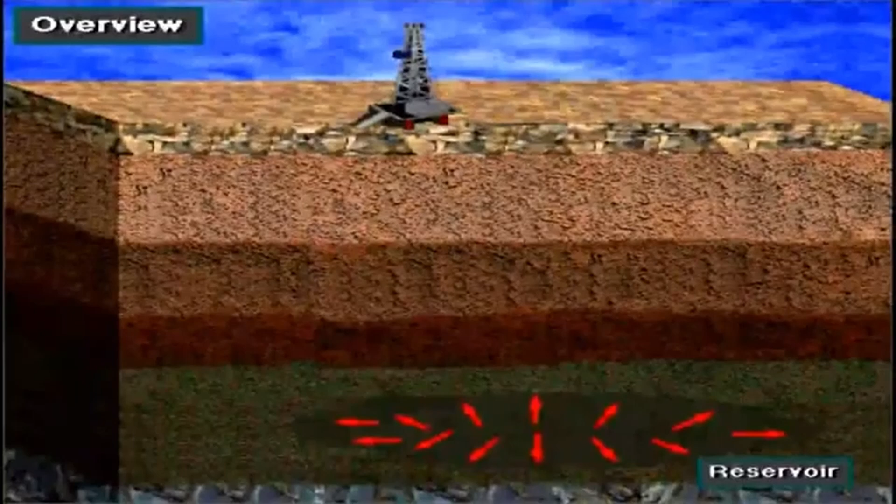Fluids in a formation are under pressure. When drilled, this pressure can escape to the surface if it is not controlled.

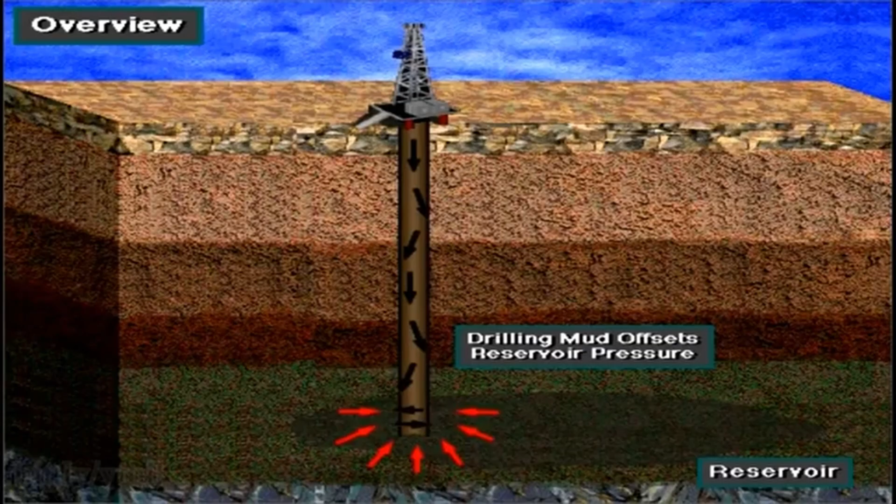Normally, drilling mud offsets formation pressure. That is, the weight or pressure of the drilling mud keeps fluids in the formation from coming to the surface. For several reasons, however, the mud weight can become lighter than is necessary to offset the pressure in the formation.

When this situation occurs, formation fluids enter the hole. When formation fluids enter the hole, this is called a kick.

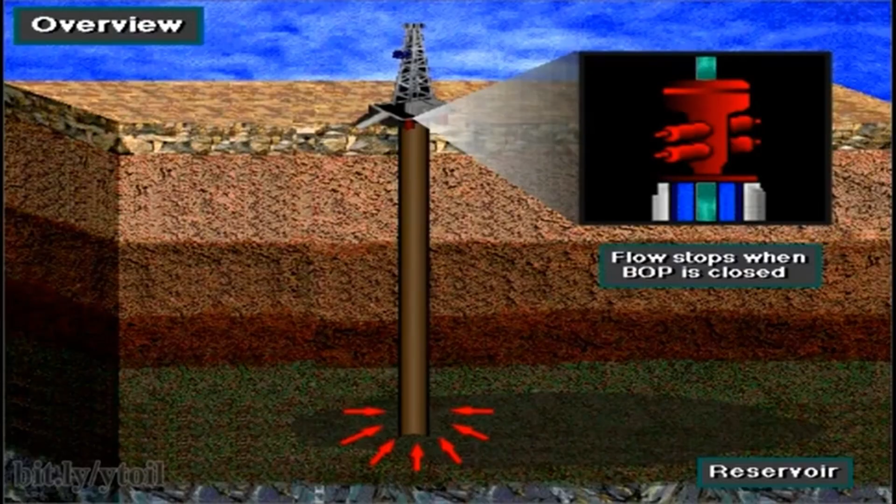A blowout preventer stack is used to keep formation fluids from coming to the surface. These are called BOPs. By closing a valve in this equipment, the rig crew can seal off the hole. Sealing the hole prevents more formation fluids from entering the hole. With the well sealed or shut in, the well is under control.

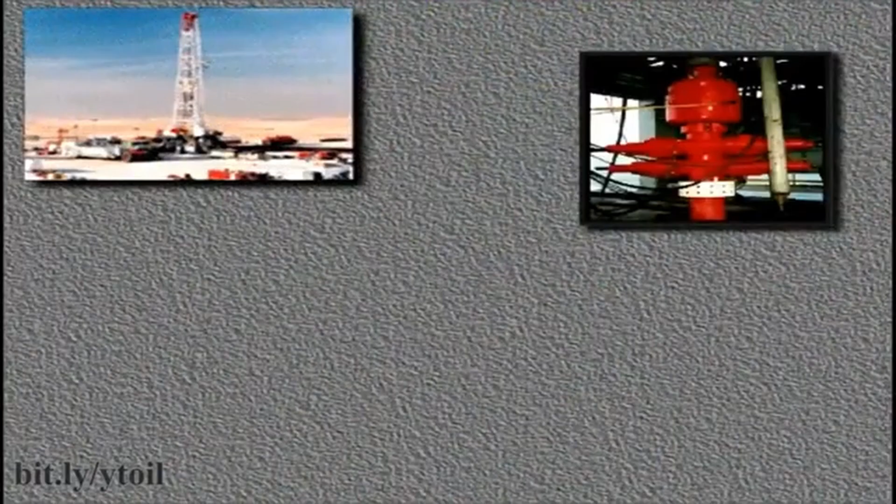Rig crews use a surface BOP system on land rigs, jackup rigs, submersible rigs, and platform rigs. They use a subsea BOP system on offshore floating rigs, like semi-submersibles and drill ships.

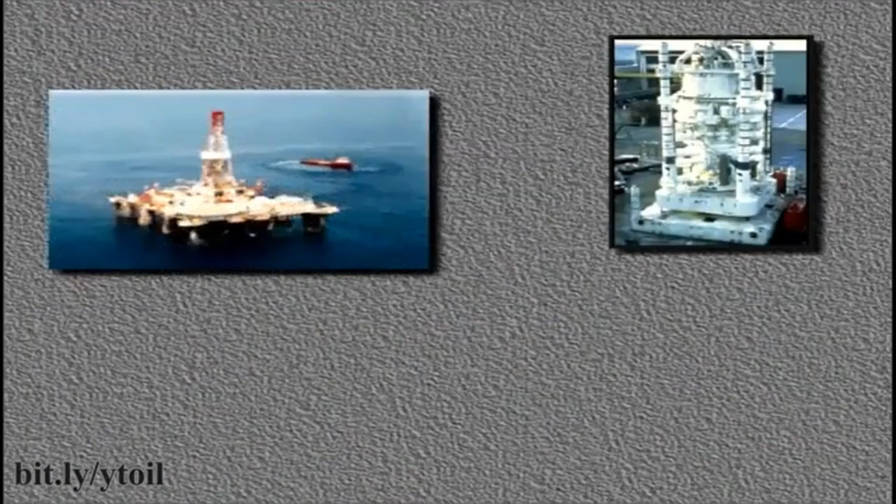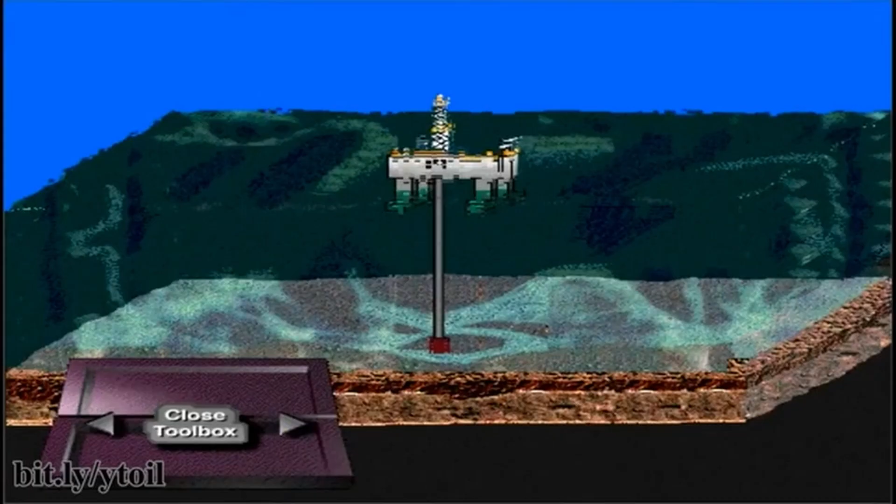Why do you suppose subsea BOP systems are used on semi-submersibles and drill ships? Blowout prevention equipment is very large and very heavy. Semi-submersibles and drill ships are dynamic, that is, they float and thus move with the wind and waves while in the working mode.

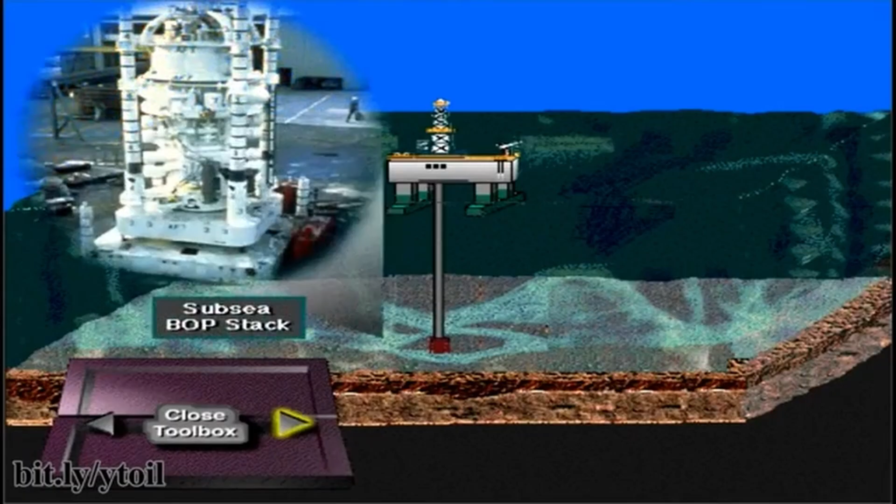On floating rigs, it's not practical to mount the BOP stack on top of the long riser pipe. The BOP stack is much too heavy for the relatively thin and flexible walls of the riser pipe. Also, because the riser walls are relatively thin, they cannot withstand the high pressures that could develop inside the riser when the well is shut in on a kick.

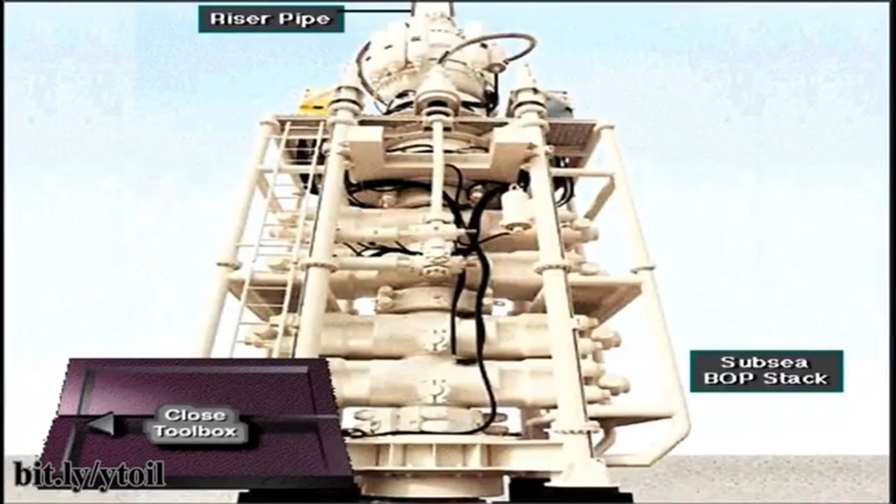So the rig crew mounts the BOP stack on the wellhead at the seafloor and makes up the riser on top of the stack. A blowout is dangerous.

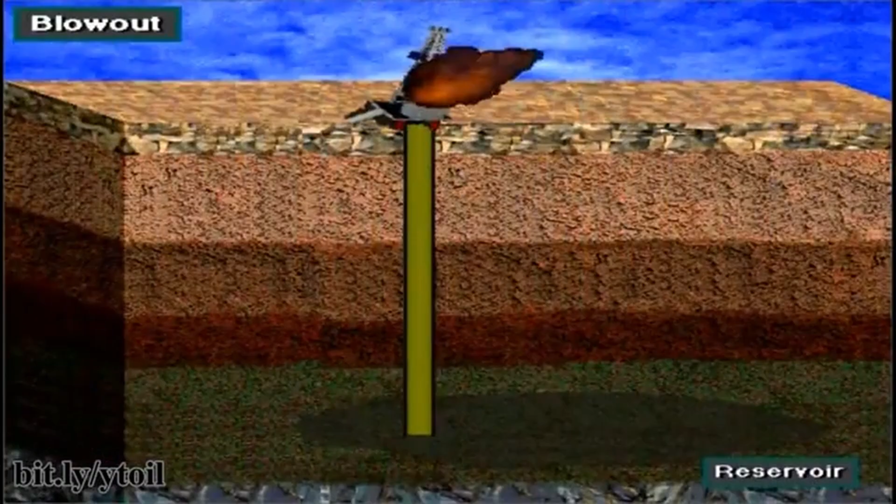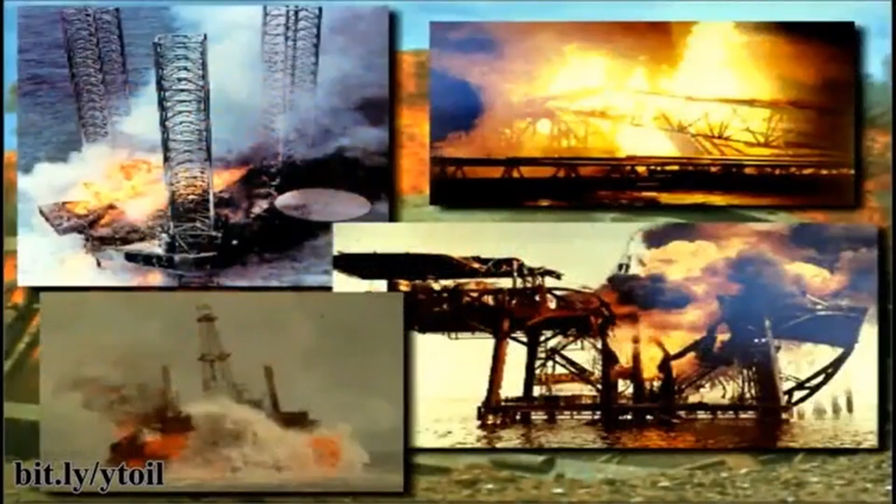Formation fluids like gas and oil blow to the surface and burn. Blowouts can injure or kill, destroy the rig, and harm the environment. Rig crews therefore train and work hard to prevent blowouts.

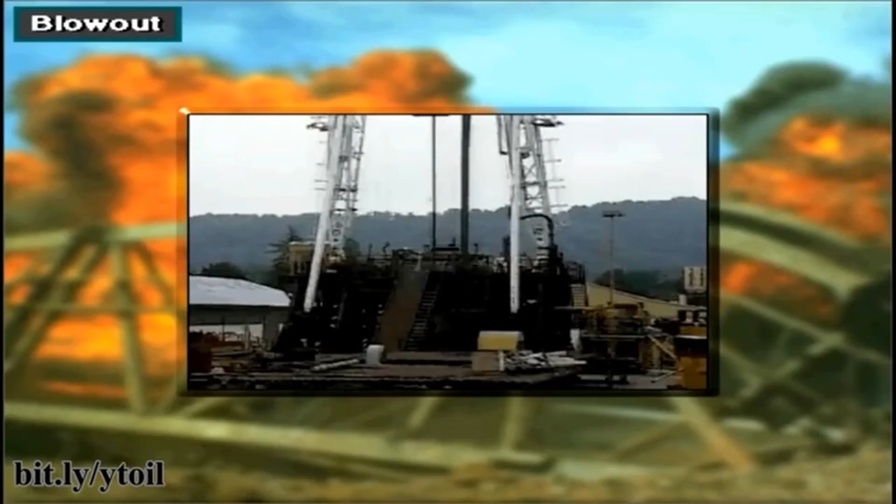Usually they are successful, so blowouts are rare. But when they happen, they are spectacular and thus often make news.

A kick is the entry of formation fluids into the wellbore while drilling. A kick occurs when the pressure exerted by the drilling mud is less than the pressure in the formation that the drill string is penetrating.

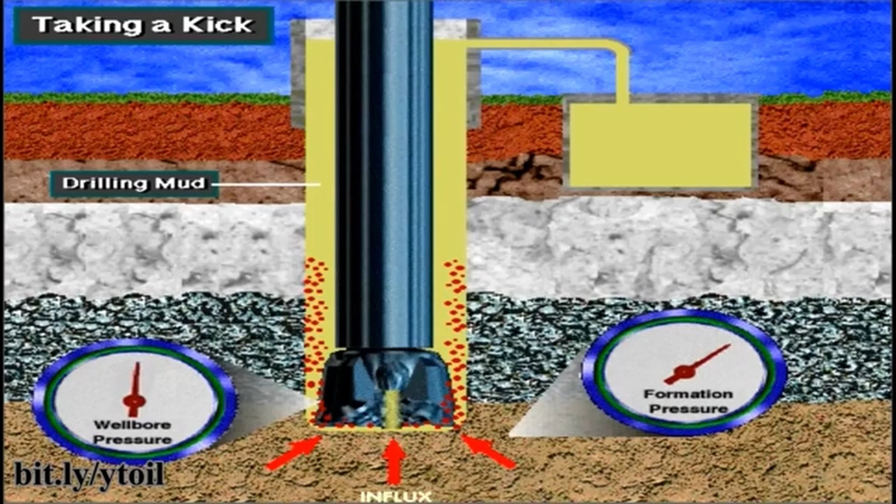The mud that circulates down the drill string and up the hole is the first line of defense against kicks. Drilling mud creates additional pressure as it circulates. The mud pressure keeps formation fluids from entering the wellbore. On the rig, they say mud keeps the well from kicking.

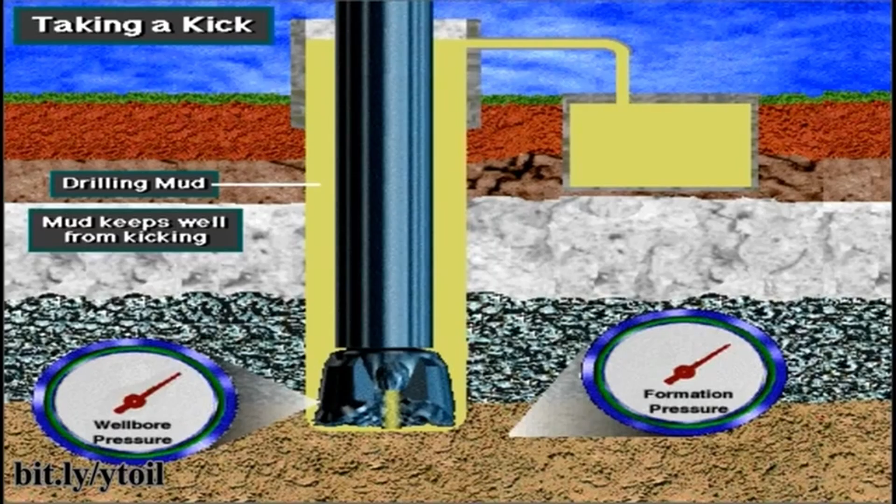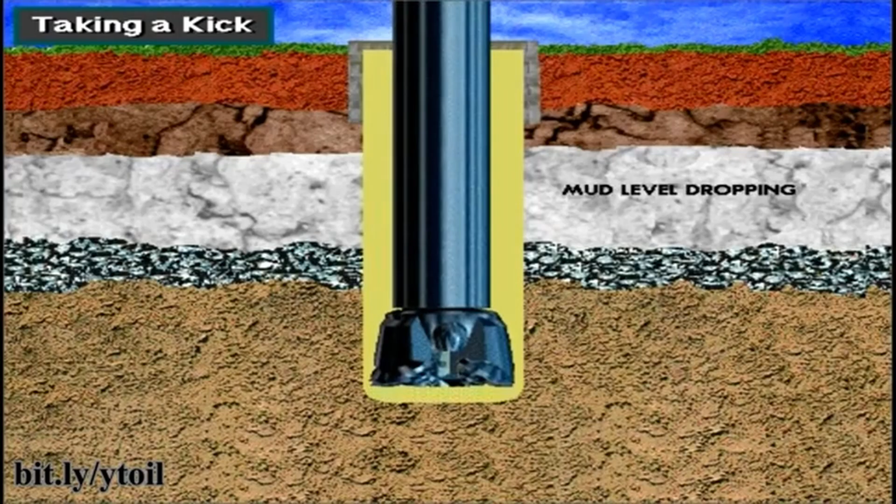Sometimes, however, crew members may accidentally allow the mud level or mud weight in the hole to drop. This drop in weight or level can happen for several reasons. For example, the crew may fail to keep the hole full of mud when they pull the pipe out of it, or they may pull the pipe too fast, which can lower the bottom hole pressure.

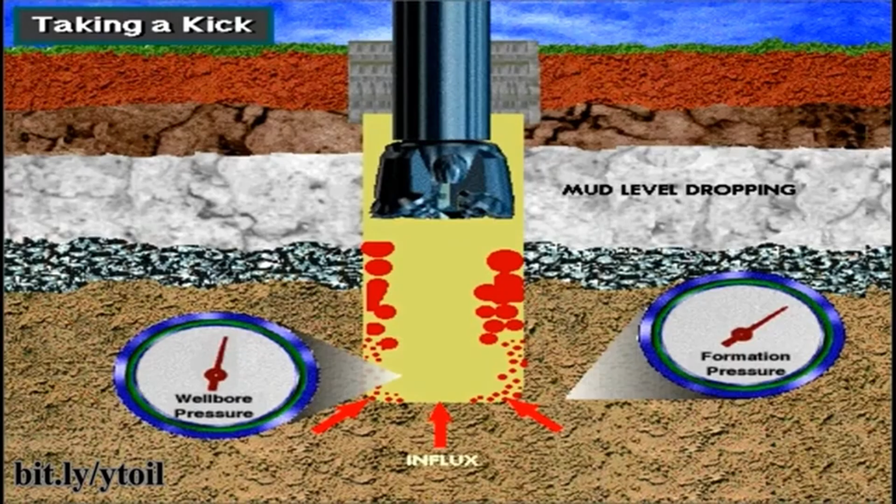When the mud level or mud weight drops, the pressure exerted on the formation decreases. If either happens, formation fluids can enter the hole. If they do, the well takes a kick. In other words, when the formation pressure exceeds the weight of the mud column, then the well can kick.

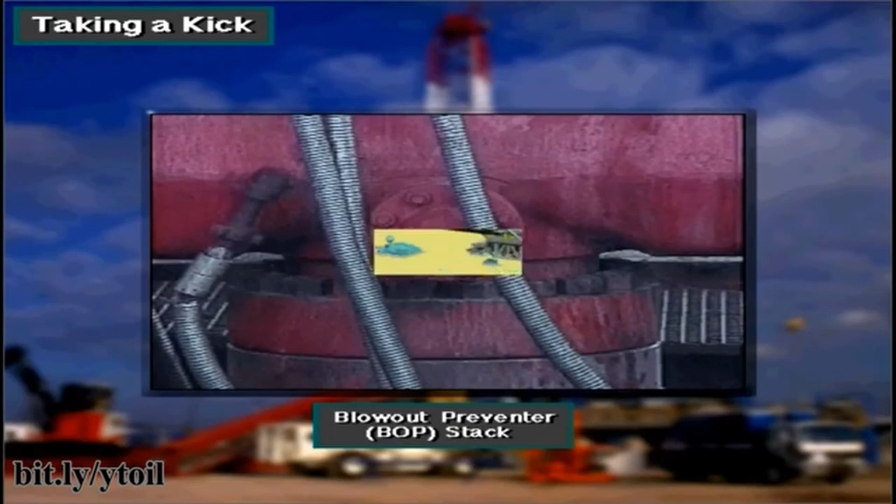To keep a kick from becoming a blowout, the rig crew uses blowout prevention equipment. The blowout preventer, BOP stack, consists of several large valves stacked on top of each other. These large valves are called blowout preventers.

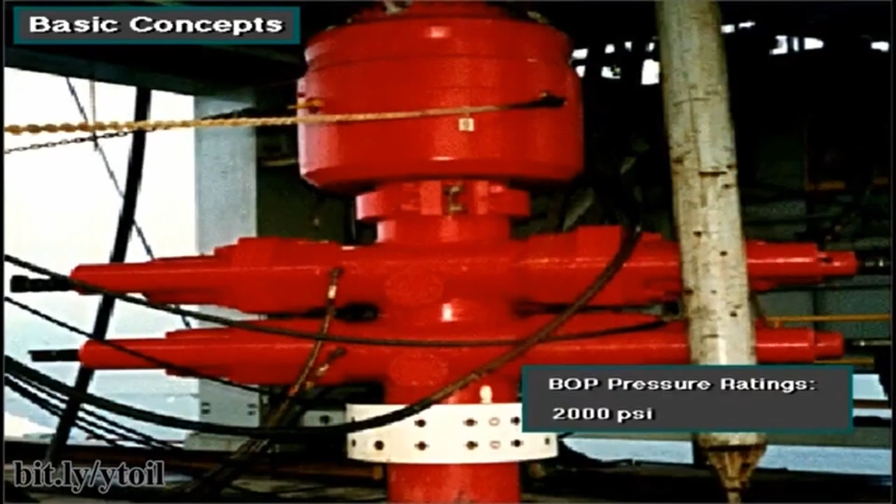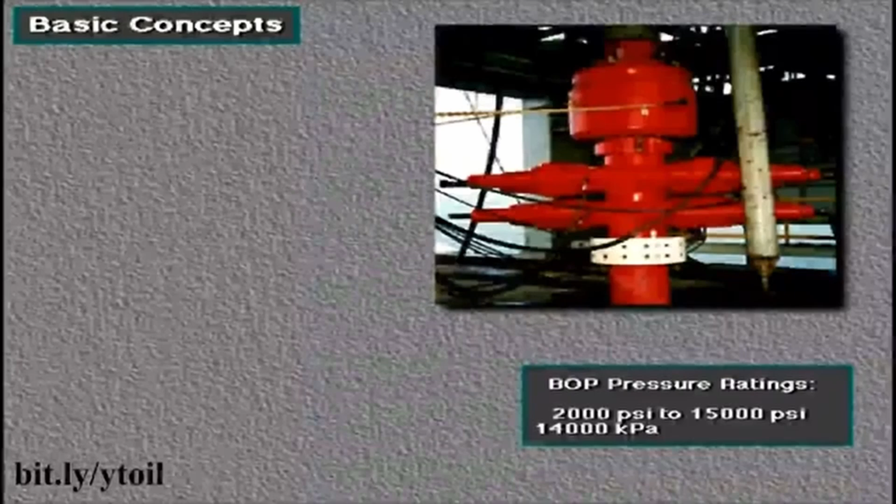Manufacturers rate BOP stacks to work against pressure as low as 2,000 pounds per square inch, or PSI, and as high as 15,000 PSI. That's about 14,000 kilopascals to over 100,000 kilopascals.

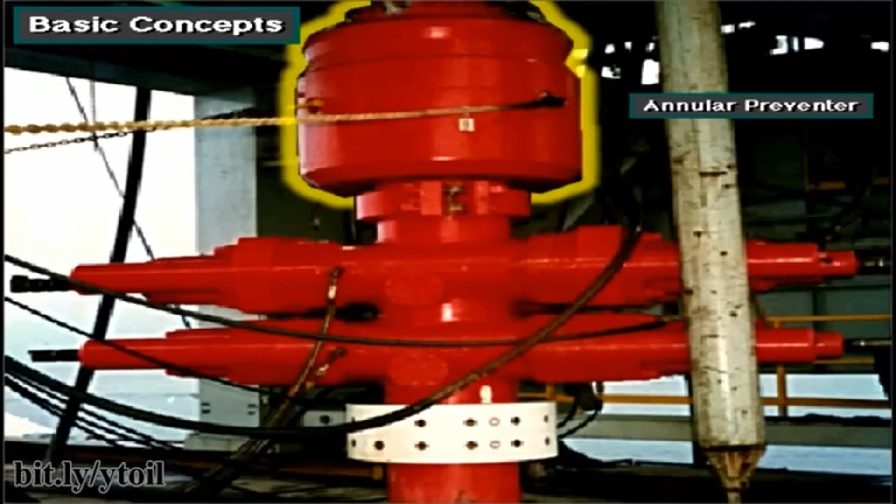Rigs usually have two kinds of preventers. On top is an annular preventer. It's called an annular preventer because it surrounds the top of the wellbore in the shape of a ring, or an annulus.

Below the annular preventer are ram preventers. The shut-off valves in ram preventers close by forcing or ramming themselves together.

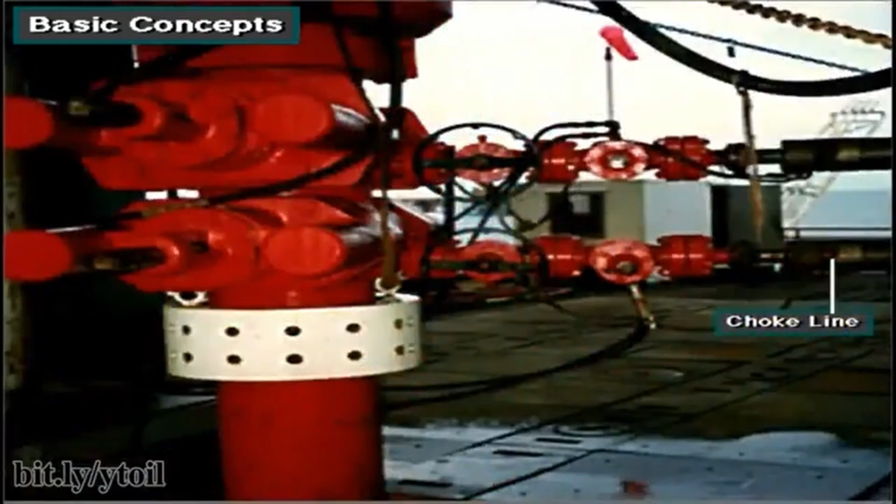The choke line is a line through which well fluids flow to the choke manifold when the preventers are closed. Even though the preventers shut in the well, the crew must have a way to remove or circulate the kick in the mud out of the well.

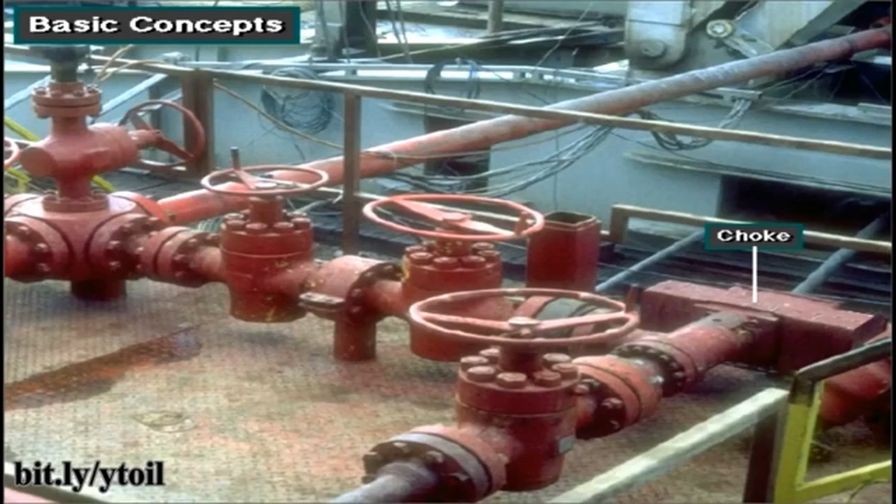When the BOP shuts in the well, mud and formation fluids exit through the choke line to the choke manifold. The manifold is made up of special piping and valves. The most important valve is the choke, which has an adjustable opening.

Crew members circulate the kick through the choke to keep back pressure on the well. Keeping the right amount of back pressure prevents more kick fluids from entering the well. At the same time, they can get the kick out of the well and put in heavier mud to kill the well, that is, regain control of it.

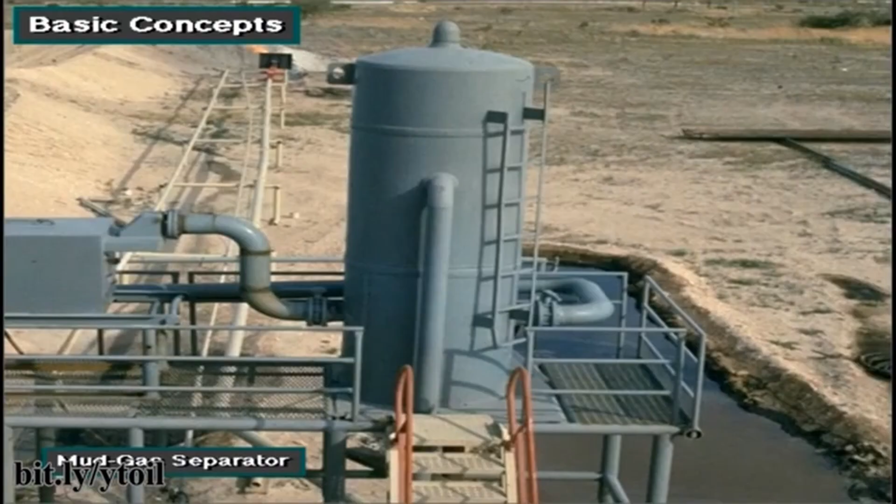The well fluids leave the choke manifold and usually go to a mud gas separator, which separates the mud from the gas in the kick. The clean mud goes back to the tanks. The gas is flared or burned a safe distance away.

When the well takes a kick and the BOPs are open, well fluids force mud to flow up the wellbore and into the BOP stack. When the driller closes the annular BOP, flow stops.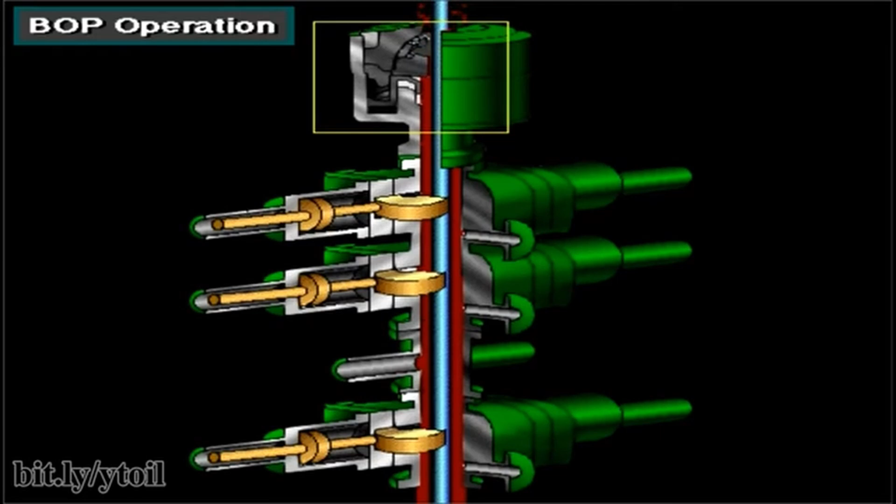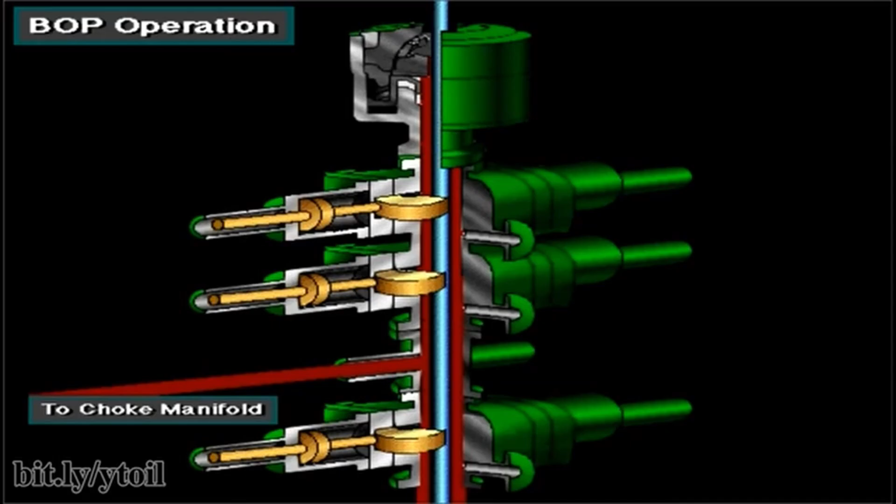Usually, drillers close the annular BOP first. The closed annular BOP diverts the flow to the choke line, which goes to the choke manifold. The driller can open a valve on the choke line and safely circulate the kick out of the well through the choke manifold.

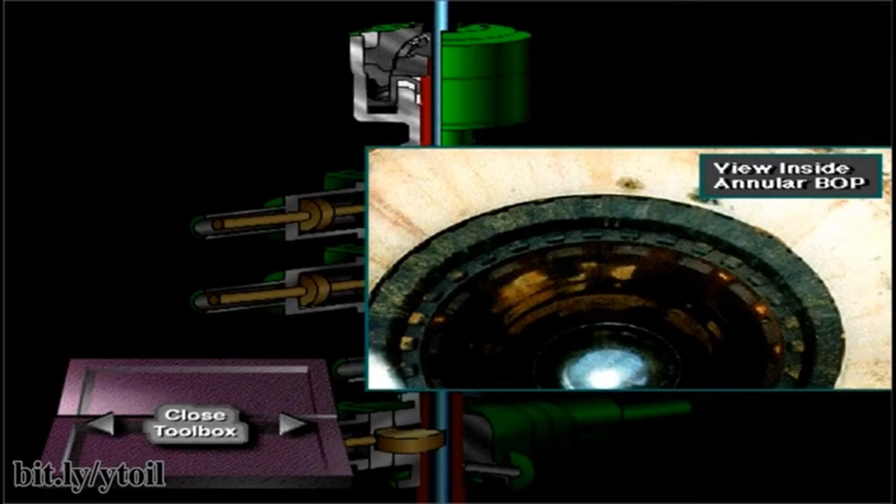Here's an annular preventer. Click on it to see how it works. An annular BOP closes on drill pipe, drill collars, or any shape of tubular in the well. It can also close on open hole, a hole with no tubulars in it at all. It's usually the first preventer used to close in the well.

Here are 4 types of ram preventers: pipe rams, blind rams, blind shear rams, and variable bore rams. Click on each one to see how the rams work.

Pipe rams are used when there is drill pipe in the BOP stack. The pipe rams fit around the pipe, closing off the annulus. Pipe rams back up the annular preventer. That is, in the unlikely event that the annular BOP failed, crew members could shut the pipe rams to seal the well. Also, some pipe ram preventers are used to hang off or suspend the drill string on subsea BOPs.

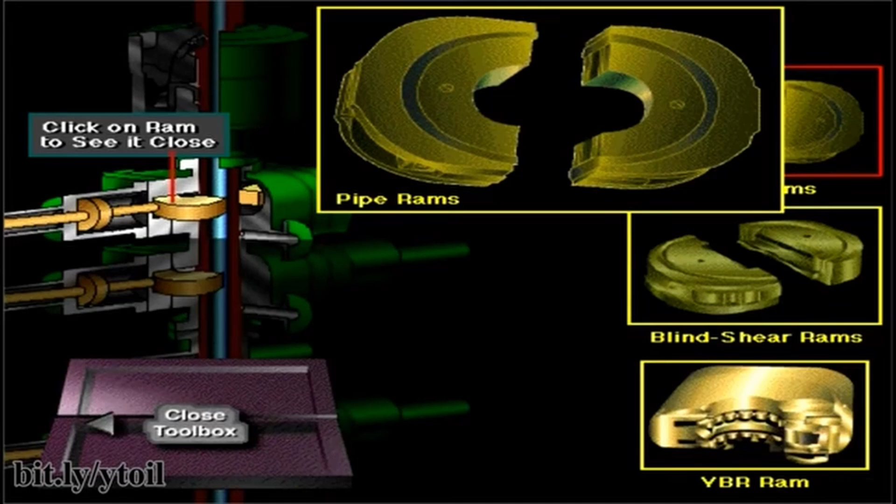Blind rams are designed to seal an open hole. If the annular BOP fails, and there is no pipe in the hole, the crew could seal the well by closing the blind rams.

Blind shear rams are designed with blades that cut through the drill pipe and then seal the open hole. They are used in extreme emergencies, like when an offshore floating rig has to move off a well they're drilling because of a hurricane or other such emergency. Blind shear rams allow them to cut the pipe, seal the hole, and then move the rig a safe distance away.

Variable bore rams, or VBR, are special pipe rams that can close over a range of pipe sizes, such as 5-inch diameter to 3-inch diameter.

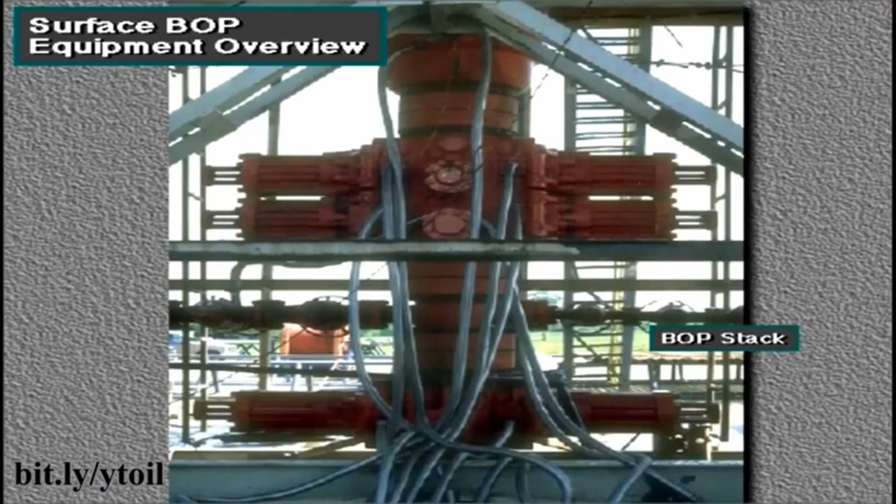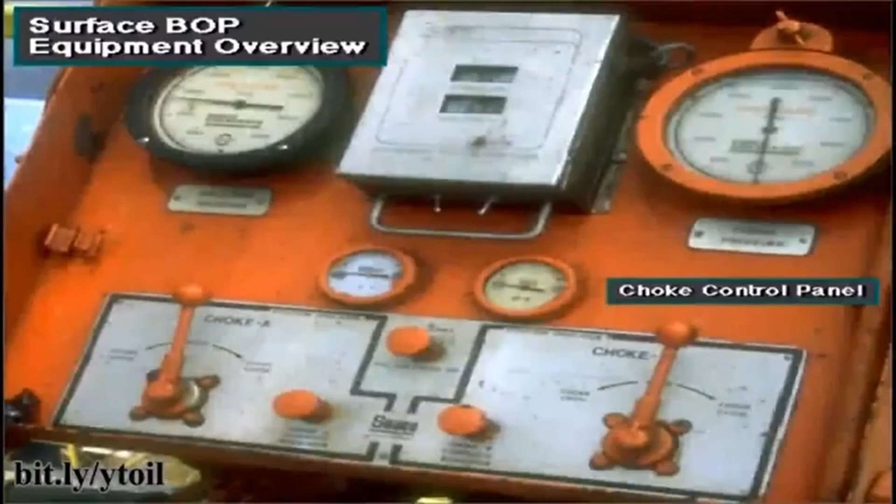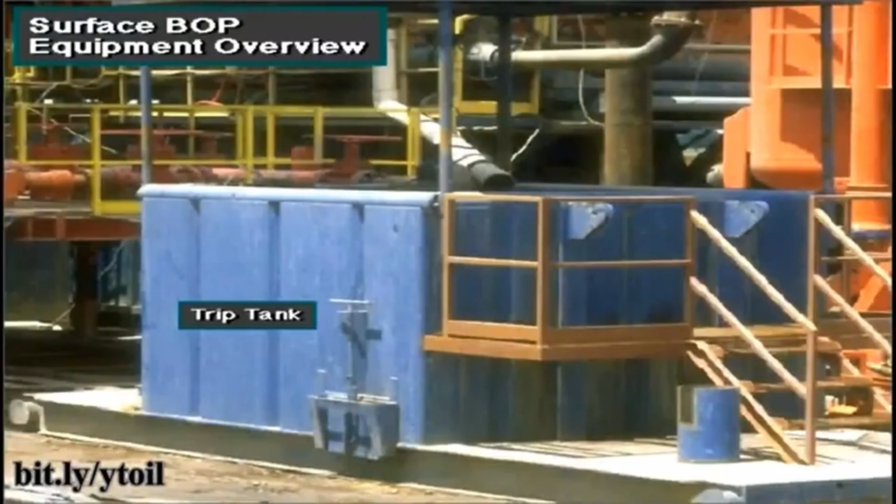Here are the major parts of a land, jackup, platform, or submersible rig's blowout prevention equipment: the blowout preventer, or BOP stack; the driller's BOP control panel; the BOP operating unit accumulator; the choke manifold; the choke control panel; the mud gas separator; the flare line and flare pit; the trip tank; and drill string valves.

Pop quiz. You've just learned the names of the equipment used in well control operations. Let's see how well you can identify the equipment.

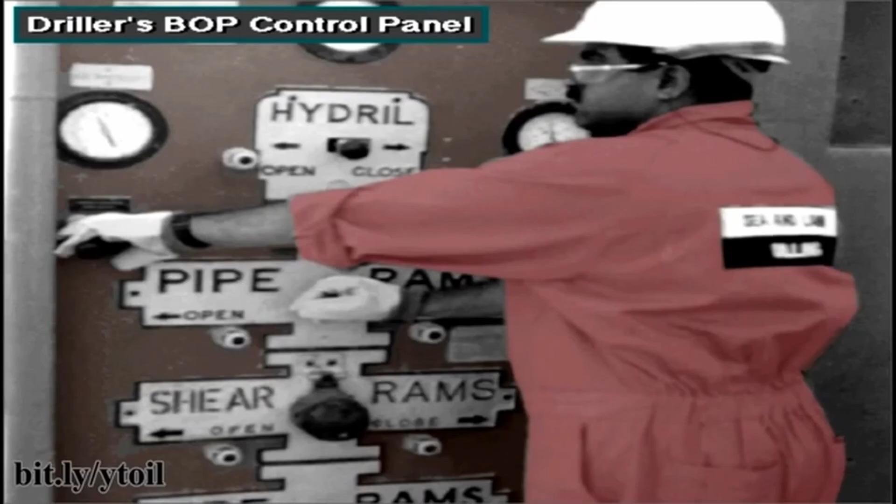From this BOP control panel, the driller opens and closes, or controls, the blowout preventers and the line to the choke manifold. Rig builders usually place the control panel on the rig floor, close to the driller's position.

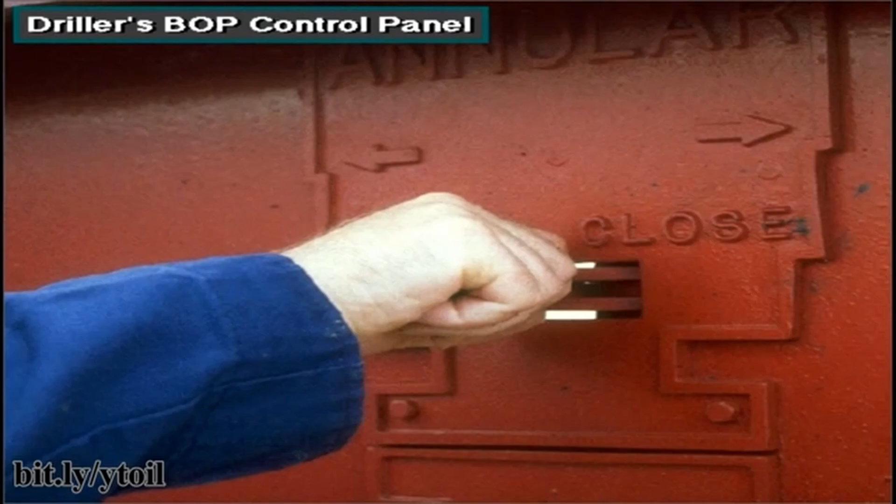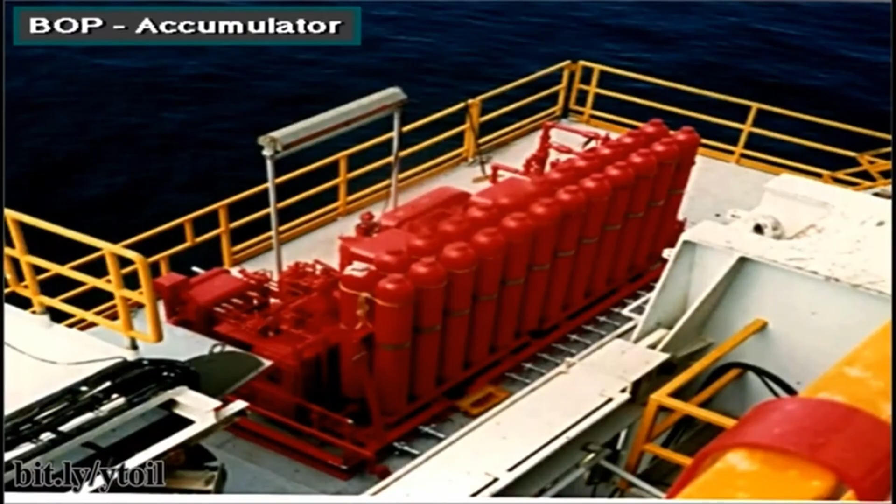Levers and switches allow the driller to quickly open and close the preventers and other valves in the system. The accumulator bottles store or accumulate hydraulic fluid under very high pressure, up to 3,000 psi, over 20,000 kilopascals. This high-pressure fluid ensures that the preventers close very fast.

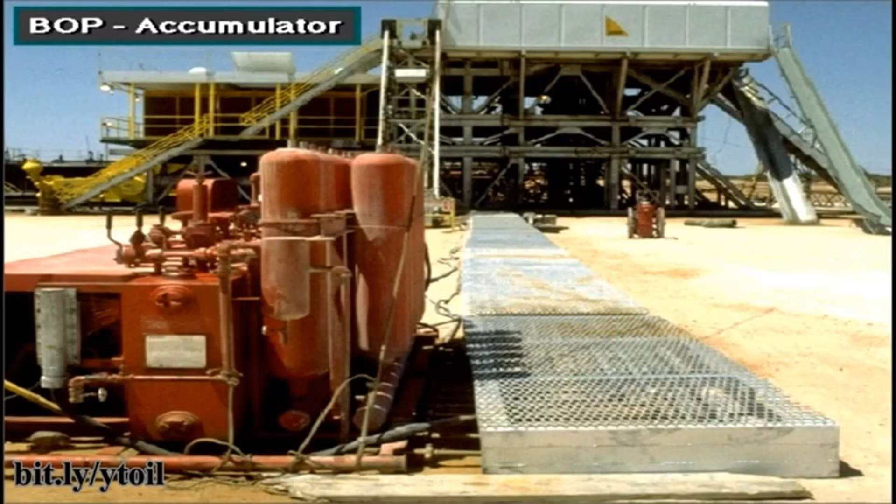The BOP operating unit accumulator is installed some distance from the rig floor. When the driller activates the BOP operating unit, it pumps the hydraulic fluid through the high-pressure pipes or lines into the BOP stack. The hydraulic pressure opens or closes the preventers.

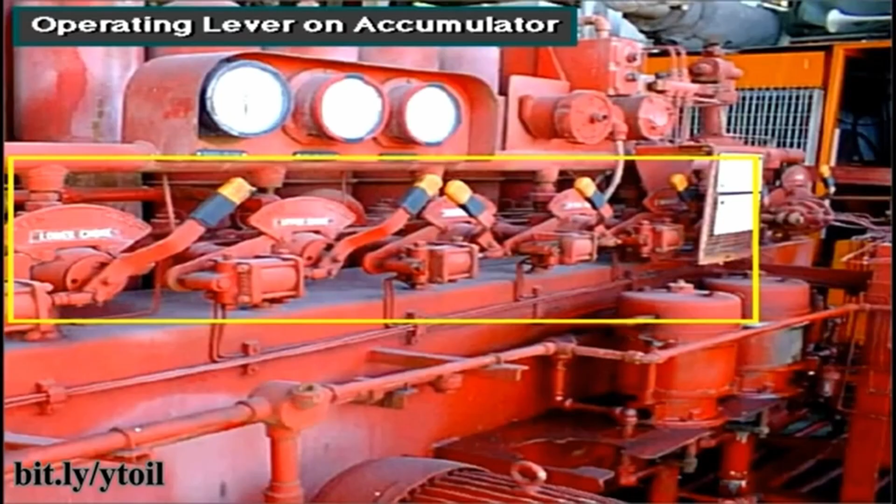Usually, the driller operates the accumulator from the control panel on the rig floor. In an emergency, however, crew members can operate the BOPs by using the control valves on the accumulator itself.

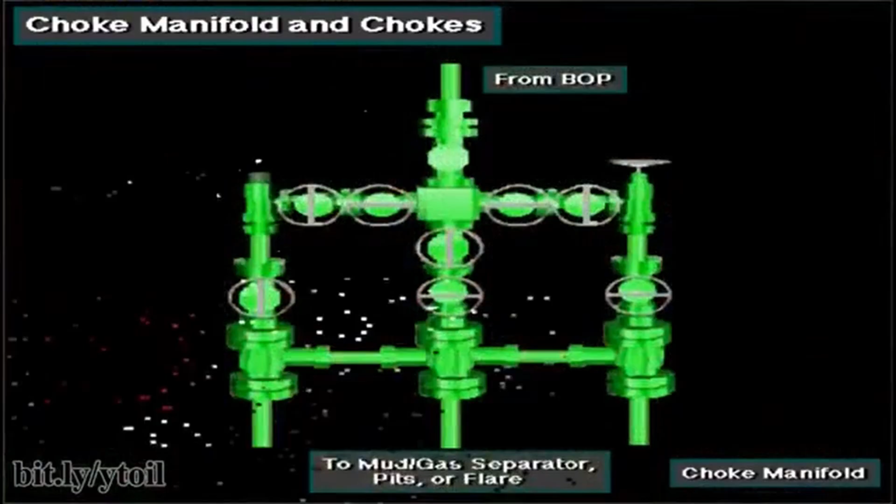Here's a choke manifold. Flow gets to it from the BOP stack via a choke line. The manifold usually has 2 or more special valves in it called chokes. Usually well flow goes through only one of the chokes.

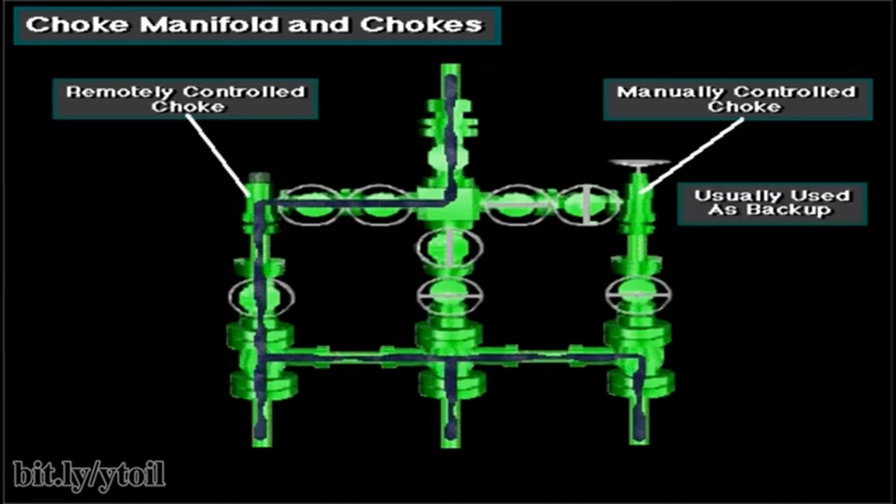The others are backups or used under special conditions.

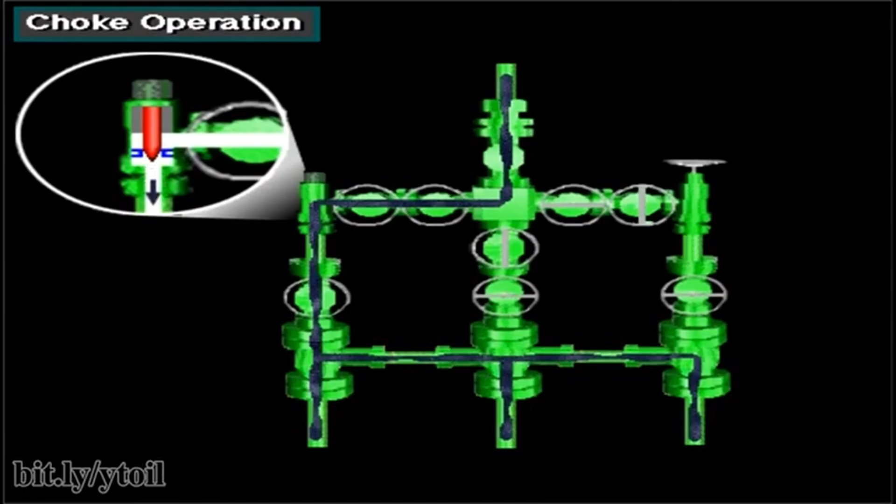By adjusting the size of the opening in the choke, making it larger or smaller, the driller adjusts the amount of flow through the choke. The smaller the opening, the less flow; the larger the opening, the more flow. The less flow, the more back pressure on the well; the more flow, the less back pressure on the well.

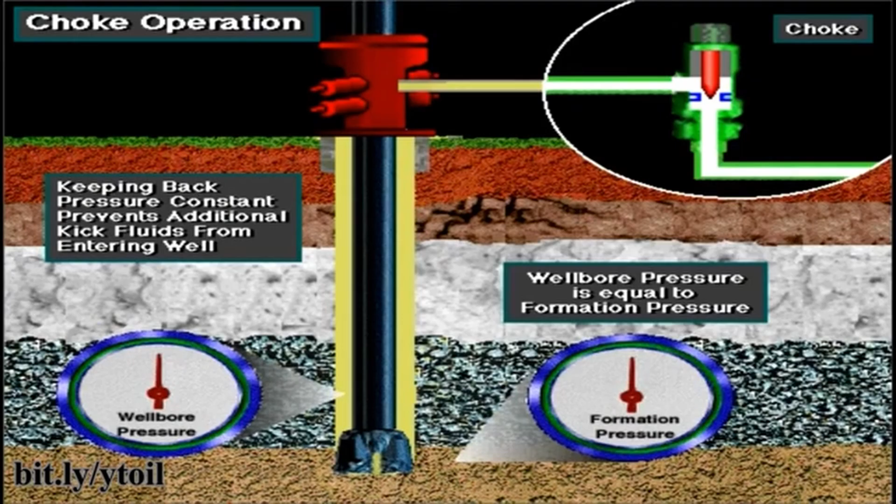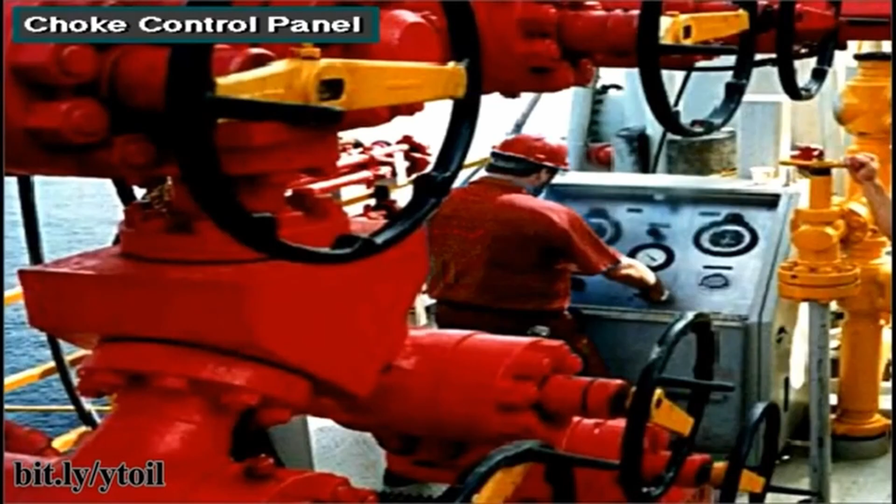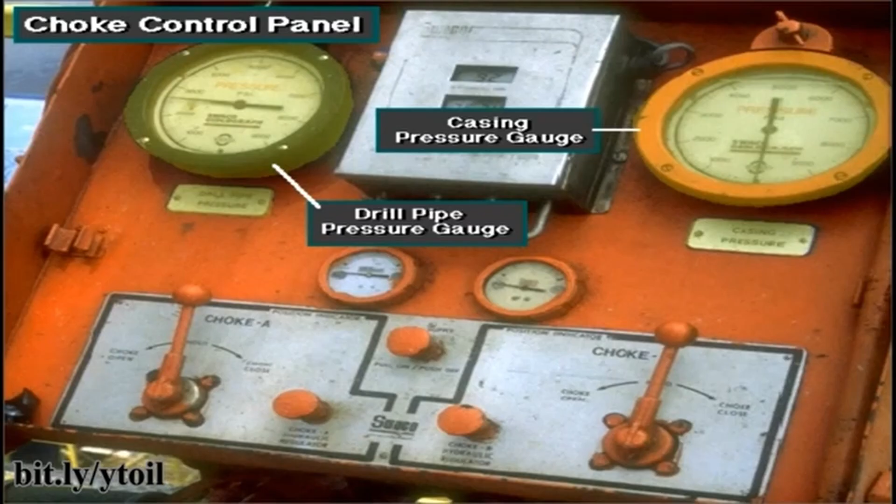This adjustment of back pressure keeps the pressure on the bottom of the hole constant, so no more kick fluids can enter the well. The driller or another crew member uses the choke control panel to adjust the size of the choke's opening as kick fluids flow through it. By watching the pressure on the drill pipe and casing, and keeping the mud pump at a constant speed, the choke operator can adjust the choke to keep the bottom hole pressure constant. This is necessary to successfully control and circulate a kick out of the hole.

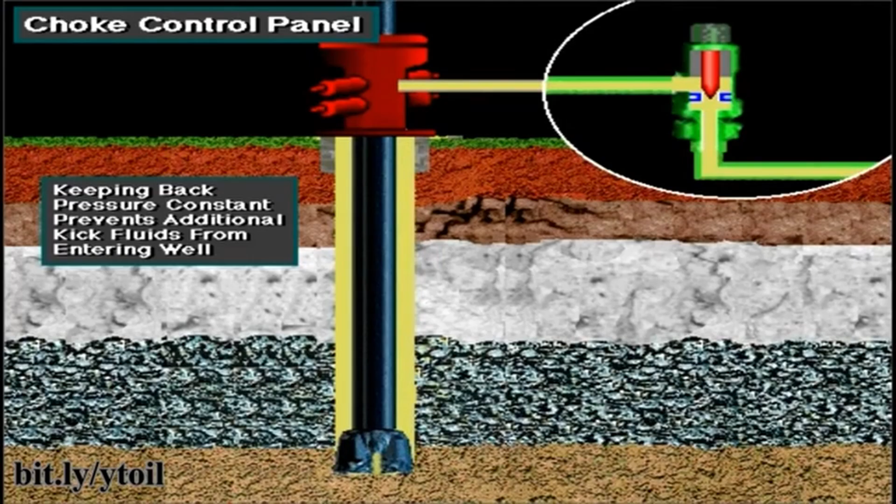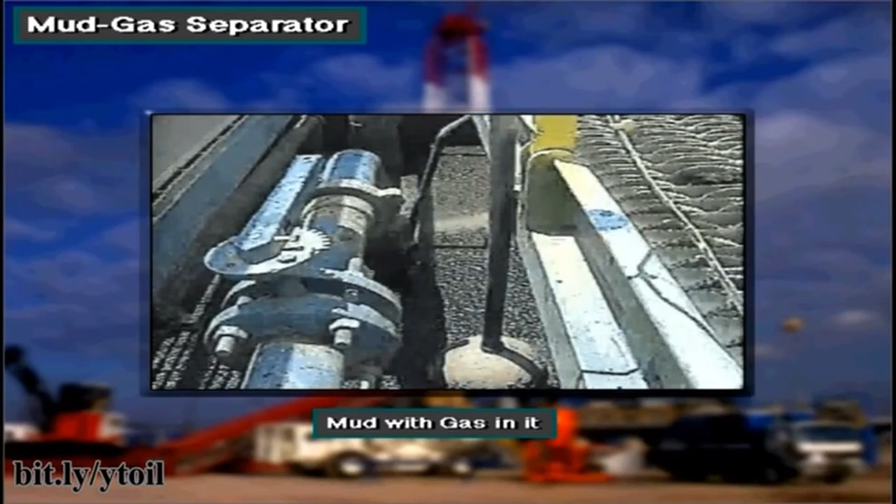Often, kick fluids and mud from the choke manifold go through a line to a mud gas separator. Frequently, formation gas is the main part of a kick, but kick fluids may also contain water, oil, or a combination of these. In any case, the mud gas separator removes the gas from the mud, and with the gas removed, the pump circulates gas-free mud into the mud tanks and back down the hole.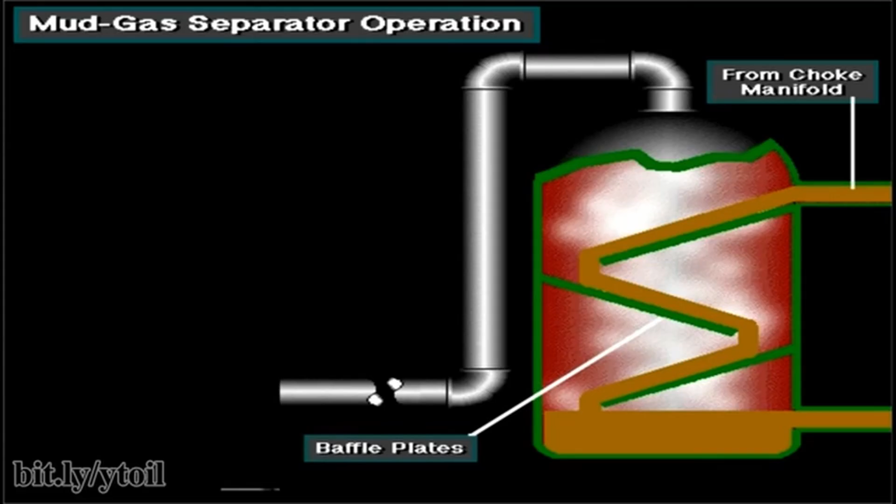The separated gas goes to a flare line. In the separator, mud with gas in it from the choke manifold enters the top and falls over several baffle plates. The gas breaks out of the mud as it falls over the plates and goes into the flare line, while the gas-free mud falls to the bottom outlet, where it goes to the mud tanks for circulation downhole.

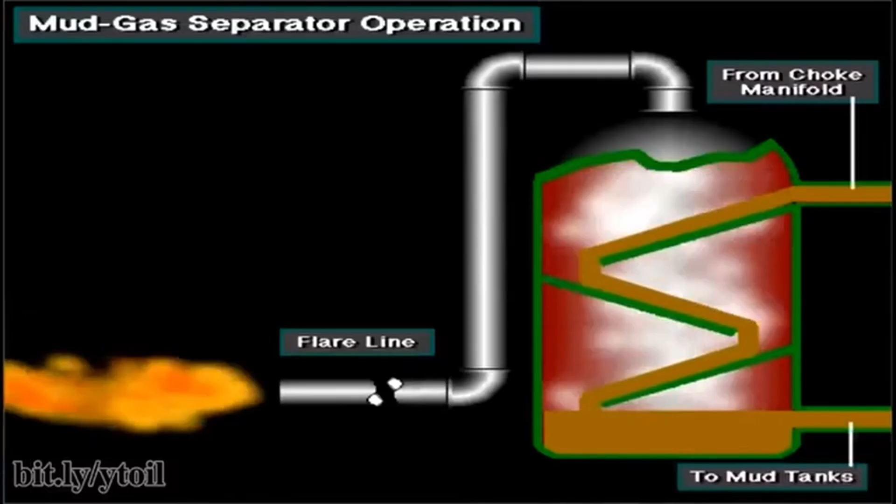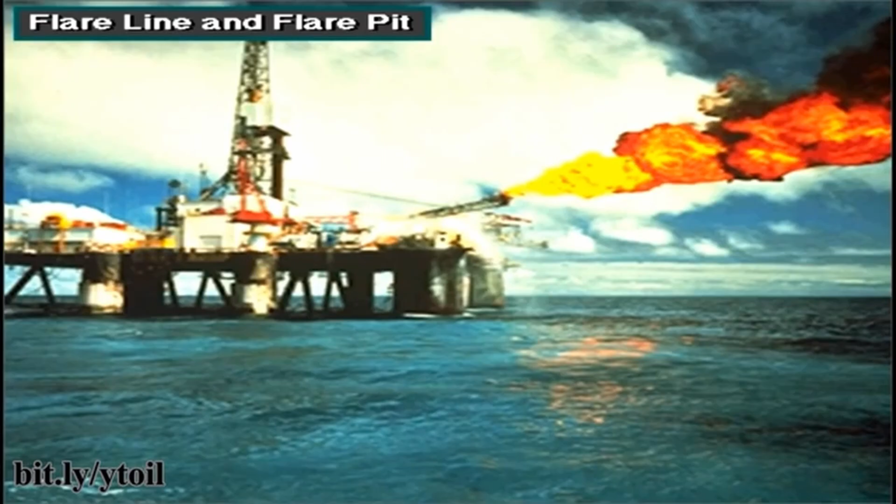The flare line conducts gas from the mud gas separator to a flare pit on land rigs, where the gas is burned or flared. Notice that the flare line outlet is a good distance away from the rig floor, so even while gas is flaring, the crew can still safely work there. Offshore, where there's no flare pit, the flare line conducts the gas over the side of the rig, running over the water a safe distance away from the rig.

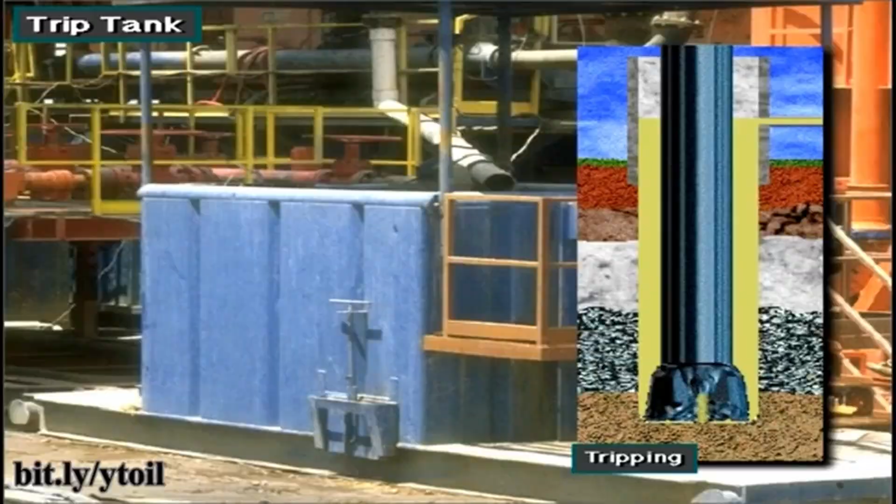A trip tank is a special mud tank. It is used when they pull drill string from the hole, for example to change out a dull bit, and also when they run drill string back into the hole. Pulling the drill string and running it back in is called a trip, which is why they call this small tank a trip tank. They use it to keep accurate track of how much mud the drill string displaces in the hole.

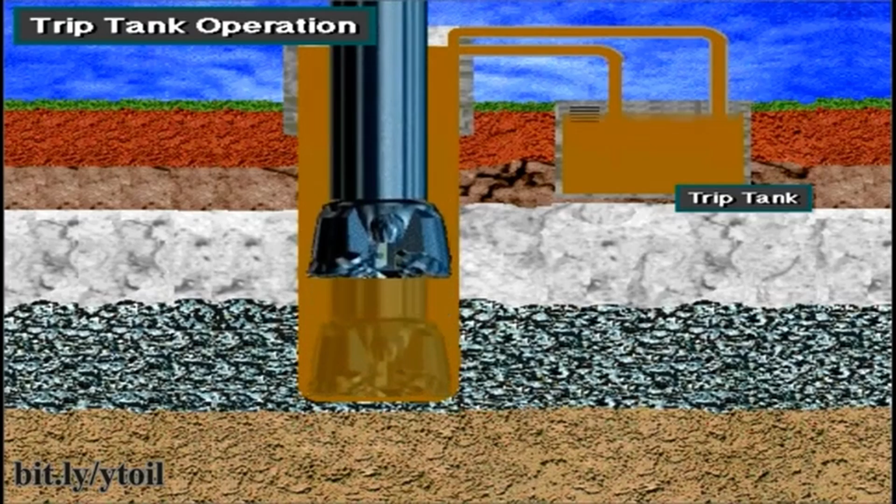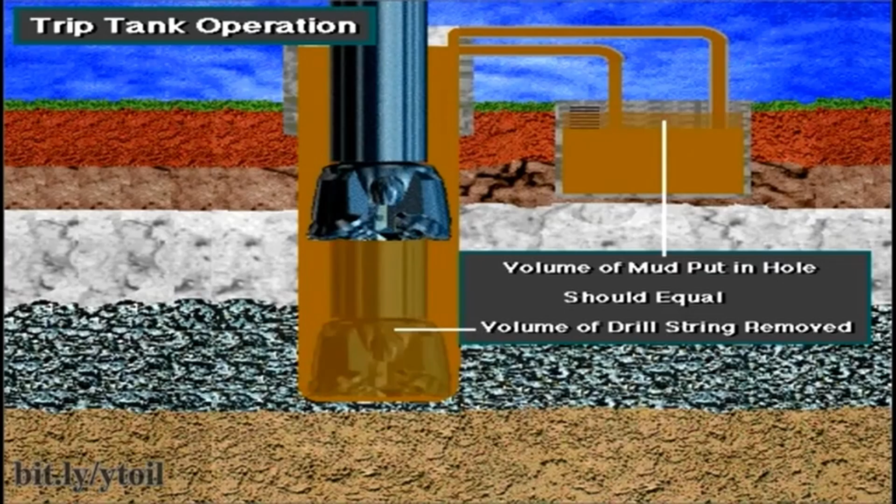When the crew pulls drill string from the hole, the mud level in the hole drops. If they let the mud level drop too far, it won't exert enough pressure to keep formation fluids from entering the hole. So as the crew pulls pipe, they continually circulate fluid from the trip tank to replace the drill string and keep the hole full. They also watch for unusual changes, making sure the volume of mud they put in exactly replaces the volume occupied by the drill string.

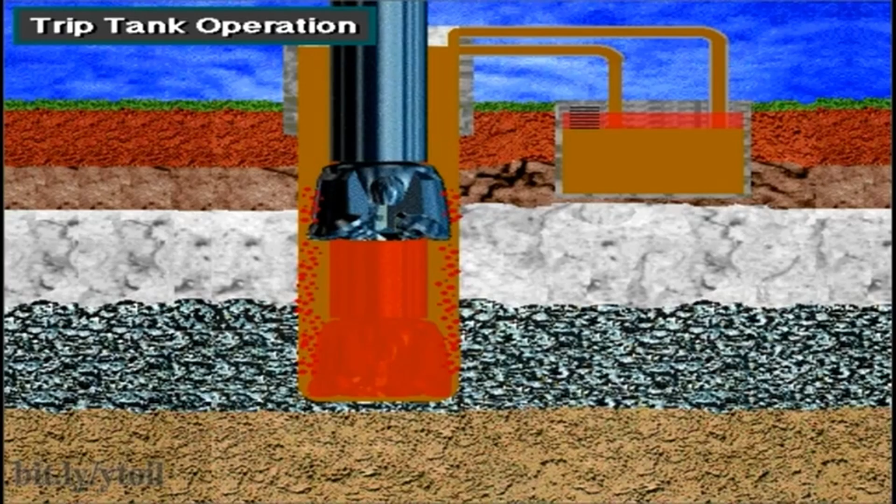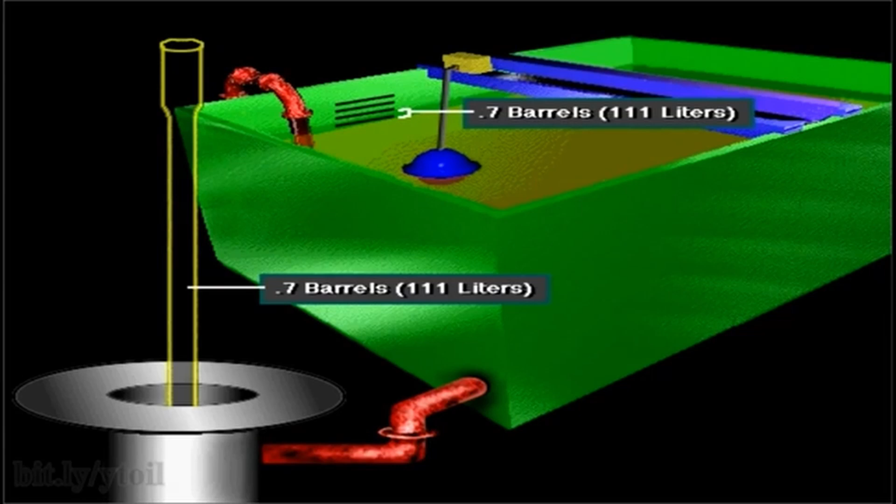For example, let's say the crew pulls one stand of drill pipe. In this instance, the stand displaces 0.7 barrels, or 111 liters. Therefore, they should pump 0.7 barrels, or 111 liters, of mud to replace the stand, and the mud level in the trip tank should show a drop of 0.7 barrels, or 111 liters. If the level in the tank shows less, then formation fluids have entered the hole, and the crew must take steps to control the well.